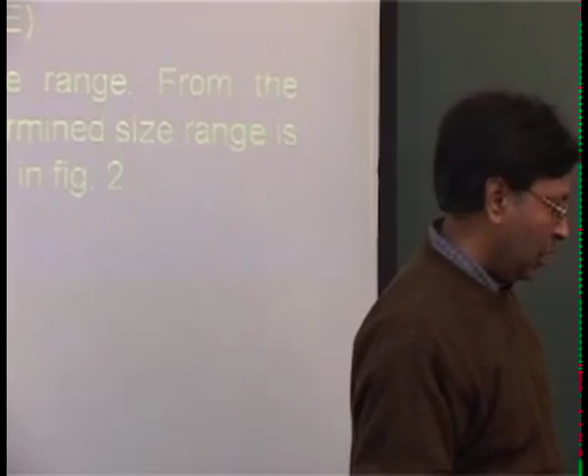Okay, then we'll go beyond what we have been saying last time in terms of the particle size and things like that. We have to now go slightly more into the particle sizes. The reason is that particle size is not uniform, unfortunately, and there will be a lot of variability there. So we will spend some time on the interpretation and see how the data in the atmosphere really look like.

The particle emissions from both man-made and natural sources do not consist of particles of any one size. That's what we said, because last time we were just sticking to one particle. Instead, they are composed of particles of a relatively wide size range. It is often necessary to describe these size ranges. Particulate matter for size distribution evaluation is measured in a variety of ways. We have to give the size distribution, like what is the mean particle size and what is the standard deviation of particle size.

Cascade impactor. Have you heard about the cascade impactor? No. See, when it comes to the matter of interest, either when you are controlling particulate matter or trying to see what particulate matter is in the atmosphere, size is very important, especially from the health point of view, and also the way you have to design a system, which particle size you want to remove. So the system which segregates the particle size uses something called a cascade impactor. It is based on inertia.

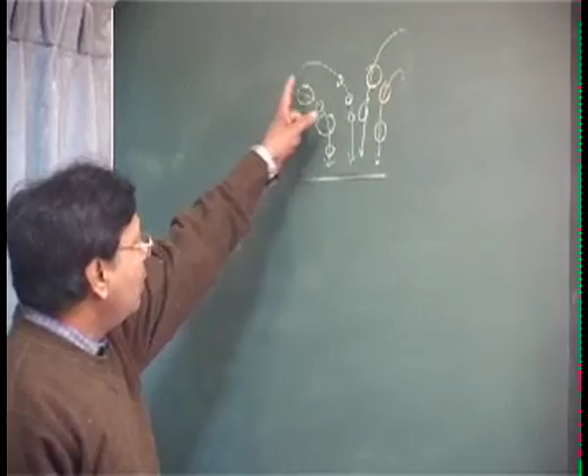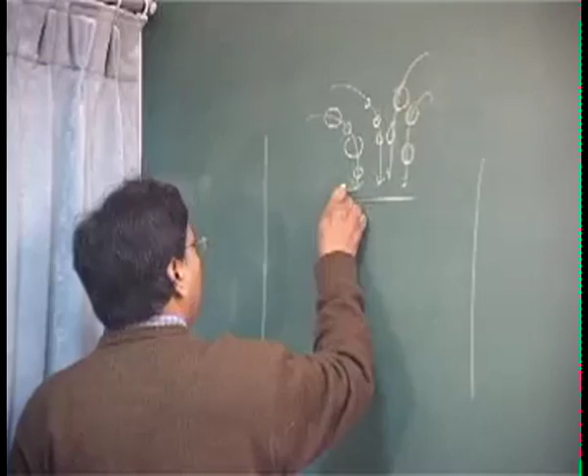Suppose I have a plate here, and my airflow is coming onto this. We have particles of different sizes, many small and some big. The particles as well as the gas stream both have inertia, right? Who has more inertia? The particle has much larger inertia, whereas the gas has almost no inertia. So the gas streams will try to turn and follow around, going beyond this plate.

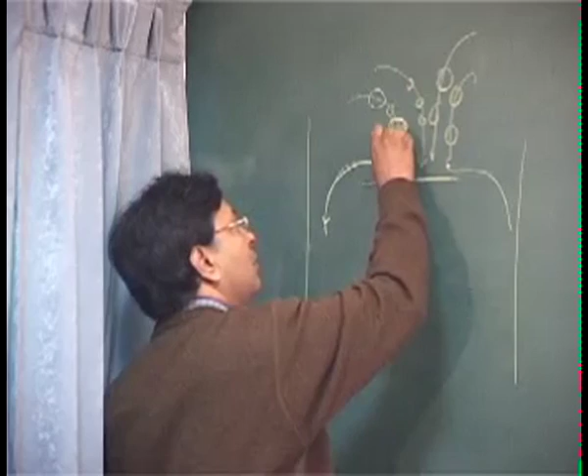Now even amongst the particles, the larger particles will have more inertia, right? So the larger particles will tend to separate out from the stream, because with their inertia they try to travel in the same direction. Whereas the small particle will escape, going along with the gas stream. So the larger particle goes and hits the plate. And to capture this particle, if you wish, you can put a little oily surface.

Once it hits, you separate out these particles, and the smaller particles will continue to move out along the gas stream, while larger particles will be stopped, just based on inertia. And then I can have a filter here, and all my fine particles will be collected here. So I can separate them out. This is called a cascade impactor.

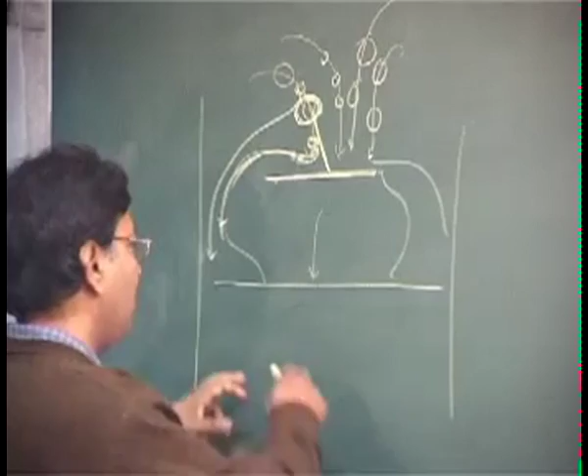It's a cascading effect. If I want to further fractionate, I can add further plates, so that some particles will stay here and some will continue to go down. So I can even find the particle size distribution. Sometimes I use the same concept while controlling certain particles, and sometimes for measuring particles in the ambient air.

In a cascade impactor, the particulate matter is separated into diameter size categories within the impactor head during sampling. The mass of particulate matter contained within each size range is recovered and determined gravimetrically. Now you can measure these particles, and most of the equipment you see will be like, for example, a PM10 analyzer, a PM10 sampler basically.

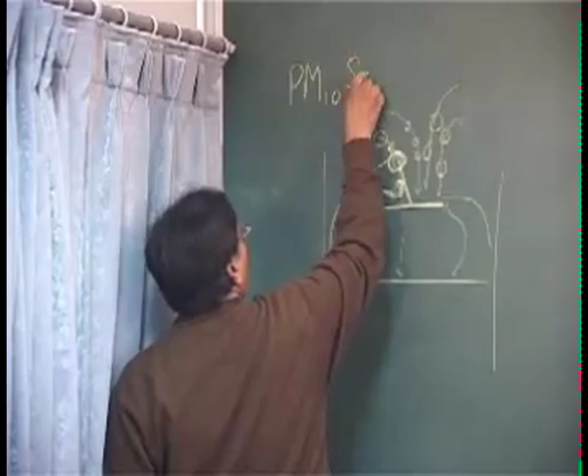Time permitting, I might show you that picture also. So in PM10, all the larger particles will stop and only PM10 particles will be retained here. Okay, the particle size less than 10 aerodynamic diameter. You can do the calculation, you can design the things because you know the inertia, you know the general structure of your particles in the atmosphere.

Particle count is also a very important thing. Some of the medical people prefer not the mass but the number of particles that are there. There is another method of data interpretation for the size distribution. We will show you figure 1 in a moment. I will show you the fly ash collected on a filter paper. The filter paper material also depends on what kind of material you have, and the reason for a particular type of filter paper material can be many.

Sometimes suppose you are doing a sampling inside the stack, and you know cellulose is very ordinary paper, right? And suppose the stack temperature is high, and you have made a very sophisticated sampler that you only want to sample the PM10 particles coming from the stack. What will happen? In the stack, the temperatures could be high, so the cellulose will completely burn out. You will say, oh well, you didn't get anything. In that case you may like to use Teflon.

Sometimes, suppose you want to find out the metals in the atmosphere. Suppose the filter paper where you are collecting itself has a lot of background heavy metals or metals, then it becomes a little problem, because the background pollution will be interfering so much with the actual thing you want to measure, so then your choice of filter paper can be different. Okay.

The particles shown in the figure are in the size range 1 to 5 micron. From the picture, the number of particles in a predetermined size range is tabulated, and that I'll show in figure 2 in a moment, because that's how we analyze the data. So what you are seeing here, the white dots are the fly ash particles, and these little black things are the filter. When you look under the microscope you can see these particles, and in fact you can also determine the particle sizes through some of the equipment.

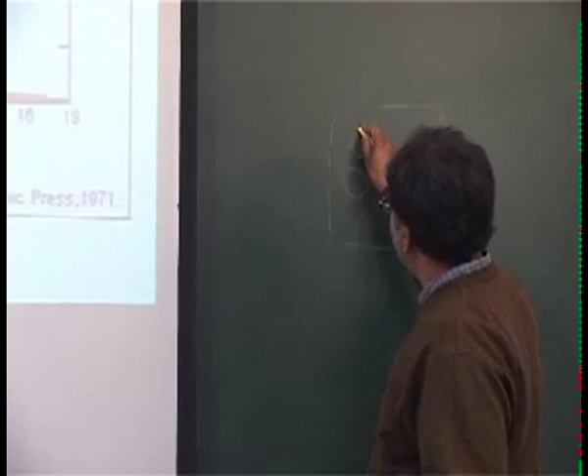What they do, some of the equipment, I'm forgetting the name, they will see the particles, they make some kind of fringe through the lights and the mechanism they have, and then that particular size of the fringe along the particle is measured through electronic means.

But the other way to show the data, because sometimes the interest may be in the larger particles, then you want to say how much quantity is the larger particles, because you have to design an equipment sometimes for a specific particle size. Maybe you want to just remove these particles. So the loading can be different for the larger particles and smaller particles.

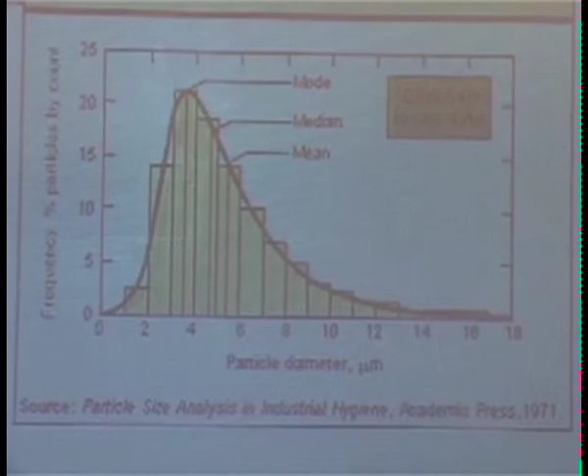This is simply a frequency plot for the percentage by counts. So the number of particles by counts that will be in that category, versus the particle diameter. And obviously we all understand mode, we understand the median, we understand the mean. There's nothing new about this one.

But I think what you need to understand from here is, suppose you have a very wide range, or not quite wide. Let's say you have something like 1, 2, and then you have 3, 3, 4, 4.5, and 5, 5.5, and you have another data point of 30 and 15. Okay.

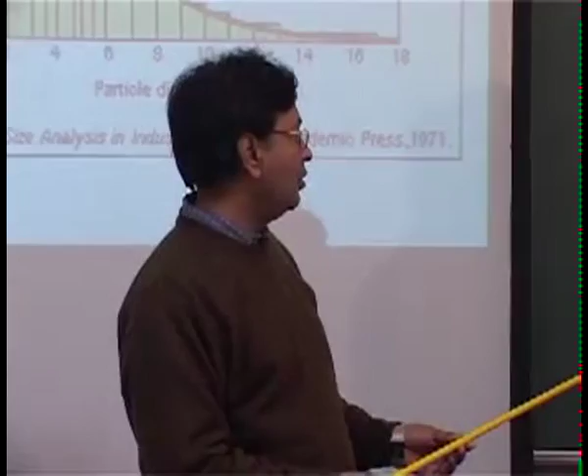You have to be a little careful sometimes. What you want to take is the mean or the median here, because you want to find out the average particle size. So you have to be careful that in such a data set you take the median, because that is a much more robust central point.

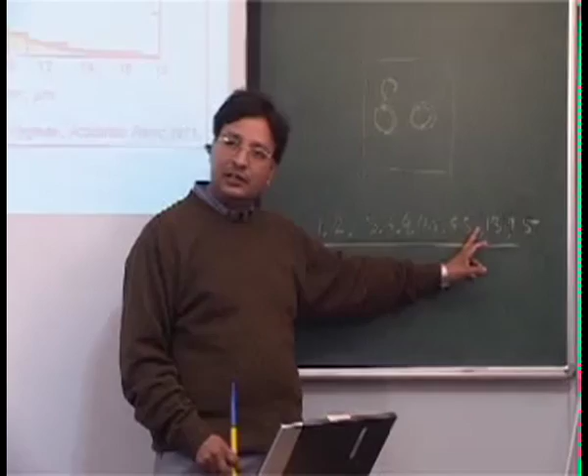Because you can see these points which are really not quite there, but they will influence your arithmetic mean hugely. And sometimes we make wrong decisions and say most of the particles are sitting somewhere at 7, and you see we have no particle at 7, not even one single particle, because the average may come out to be 7 because you have the large numbers here. But if you take the median, you can suppress the effect of the large observations.

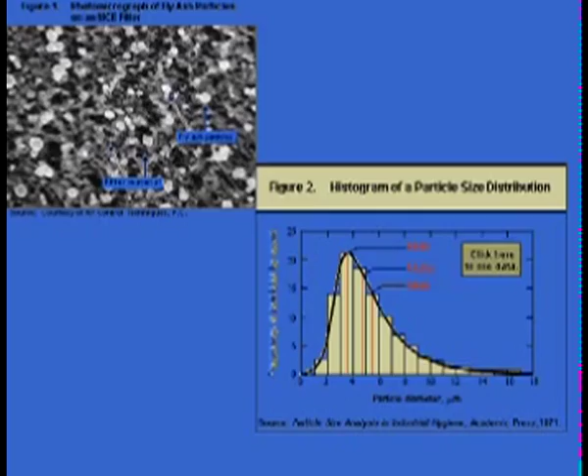The other thing which you need to see quickly is the skewness of the curve. Is this skewed to the left or skewed to the right? Skewed to the right. Always remember, because it has the extended tail onto this side, it is skewed to the right.

Most of the time, 99% of the time, when you look at environmental data, not only in air pollution but in water pollution, soil pollution, when you plot these measurements, you will find the data to be skewed to the right. Such a distribution is obviously not the normal distribution; this is what we call the log normal distribution.

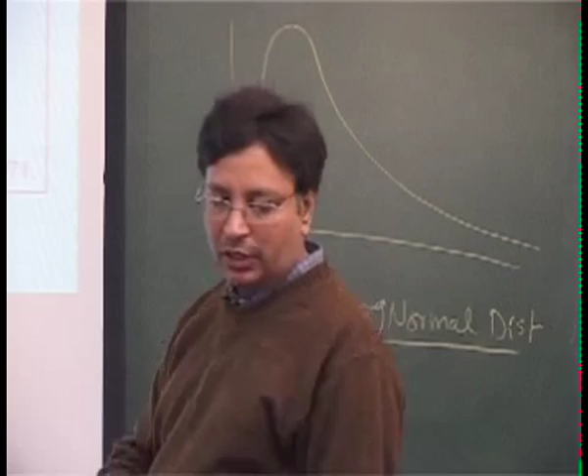We should be a little bit aware of that, because data are skewed to the right. So that is the skew thing which I wanted to show, and obviously the other way I can plot the same graph is to take the logarithm of these values, and that's what has been done to show this data, well, not quite, anyway.

Skewed distributions as shown in figure 2 are typically encountered in the field of air pollution control, and not only air pollution control, even water pollution control data. Any guess as to why the data will be log normally distributed? One of the reasons is that we are not likely to get negative numbers. So as a result, there is a tendency towards the right side, and that's why the data always skew to the right.

The median and arithmetic mean: we all understand that the mass median particle diameter is the particle diameter that divides the frequency distribution in half. The arithmetic mean we all understand, and the mode is, of course, the most frequently encountered particle.

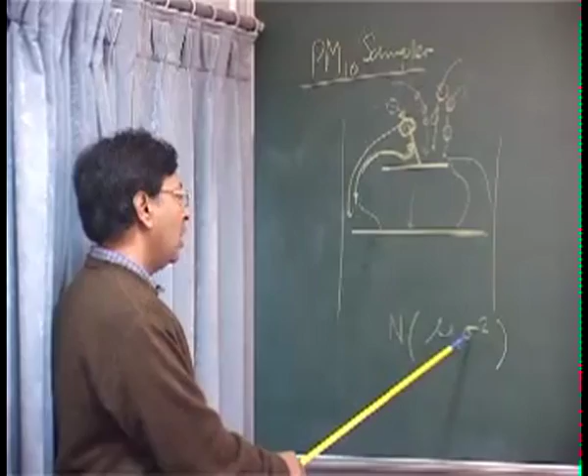So you can find the mean and variance, and if I want to describe the whole data set, suppose it is normally distributed, that is enough for me to describe the whole data set. You just write the data is normally distributed with mean mu and variance sigma squared, or you can say it is log normally distributed with mu and sigma squared.

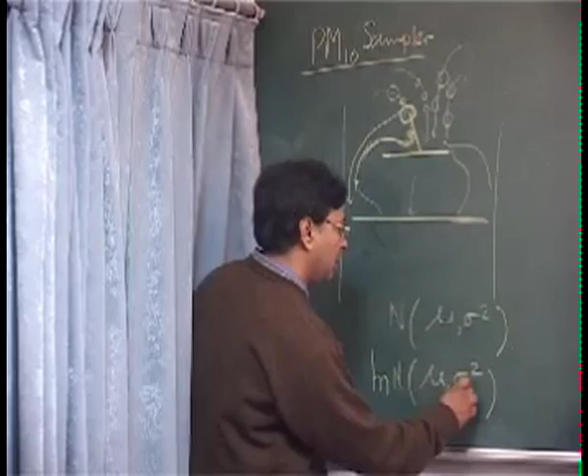Okay, some people prefer, because of log normal or geometric mean, to put ln here. Enough to describe the entire data set. Okay, how to find out the mean and variance, or other ways to find them out; we'll quickly define those terminologies, because we might use them sometimes when we are talking about the control technology.

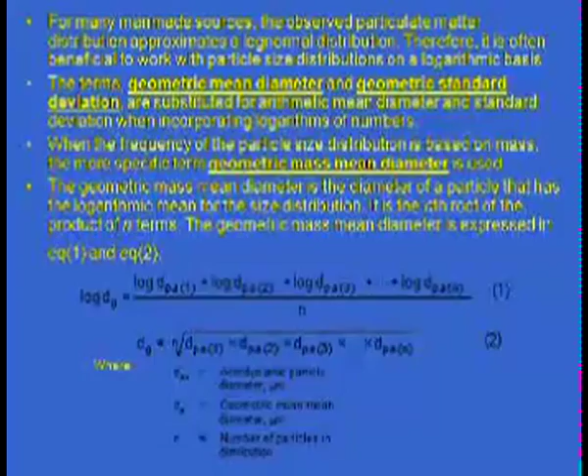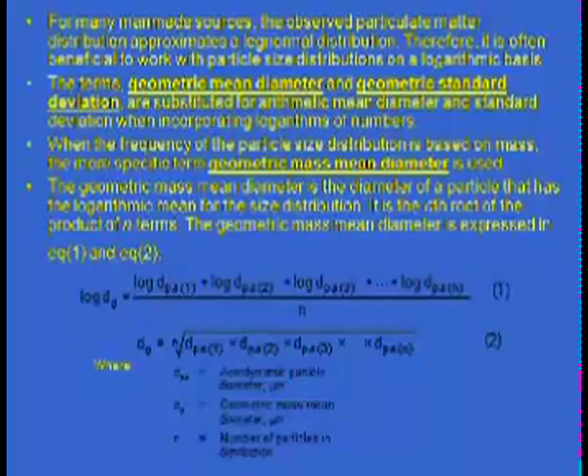Okay, the geometric mean diameter and the geometric standard deviation are substituted for the arithmetic mean diameter and the standard deviation when incorporating the logarithms of the numbers. You can take the log of each of the particles and then take the simple arithmetic average, but what it is giving you is log dg, and what I am interested in is the geometric mean. So that is how you get the geometric mean; you can come from here to here.

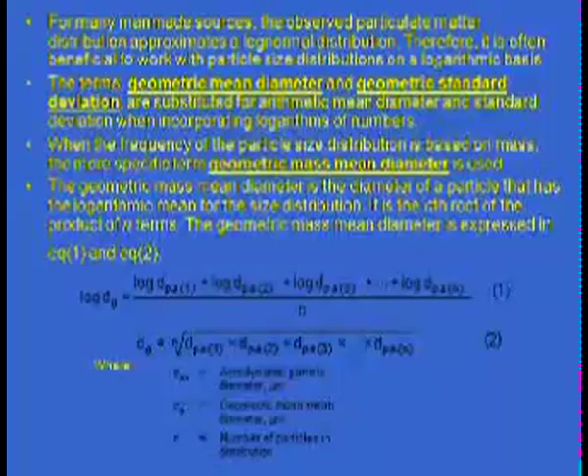Okay, the interesting thing which I want to share with you is, suppose you have observations which are a little widely distributed, 3, 5, 9, and you find out the arithmetic mean. If you take the logarithmic mean or geometric mean, what difference do you expect in these two numbers? They should be somewhat similar, of course, because they are both trying to measure the same thing.

But you will see here the impact of the larger values is kind of suppressed. And that sometimes is better, because if you have the data distributed, you expect some numbers to be more onto this side, and then you see it is compressing. So sometimes, when trying to get a more accurate number, the geometric mean is better than the normal arithmetic mean.

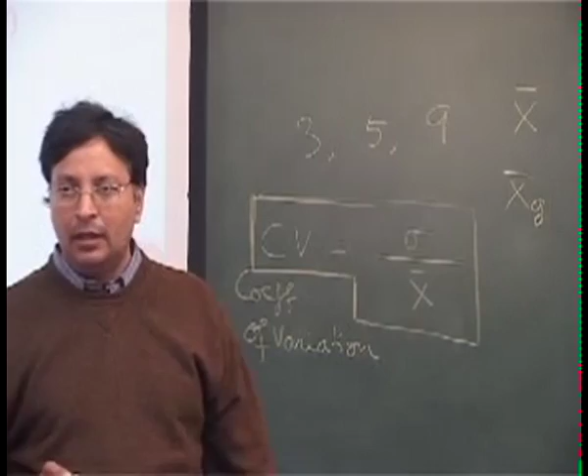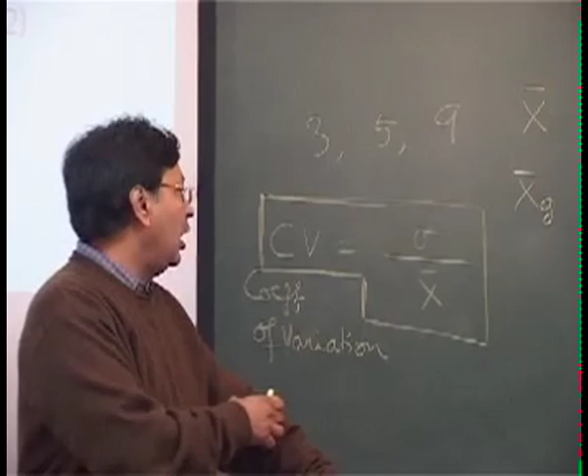There is another thing which we sometimes want to define, which I am not writing here: the coefficient of variation. This is your standard deviation divided by the mean. Very simple thing, but very useful. Why useful? Sigma gives you the variability in the data, and what units will sigma have? It will have the same unit as x, right?

So suppose I am comparing the variability, let's say we talk about water pollution, in terms of BOD and COD. Or let's say you are comparing between BOD and pH. The measurement of BOD is in milligrams per liter, and that can vary from 2 to 2000, and pH will vary in a narrow range, and the units are different.

But you want to say which data is more distributed. Where it is more distributed, you have less confidence in the measurement. So for any data you can find out the coefficient of variation, and it becomes dimensionless, and then you can compare anything versus anything. Another little tip, more like a thumb rule from experience, you can also try this one.

Generally, if it's less than 0.5, you would expect data to be normally distributed. Generally, normally distributed.

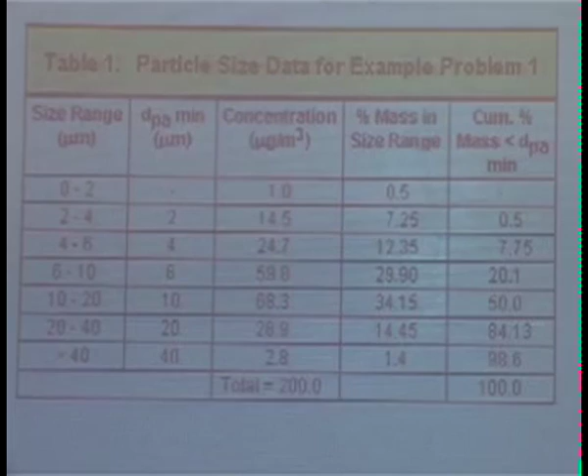Now what you want to do is the percent mass in the size range. So what have you done here? Now you're looking at the mass. How will you get this number? Simply by dividing by 2 in that range. And then you want to plot the cumulative, so the cumulative here is 0.5, then 0.5 plus 7.25 is 7.75, 7.75 plus 12.35 is 20.1, and so on.

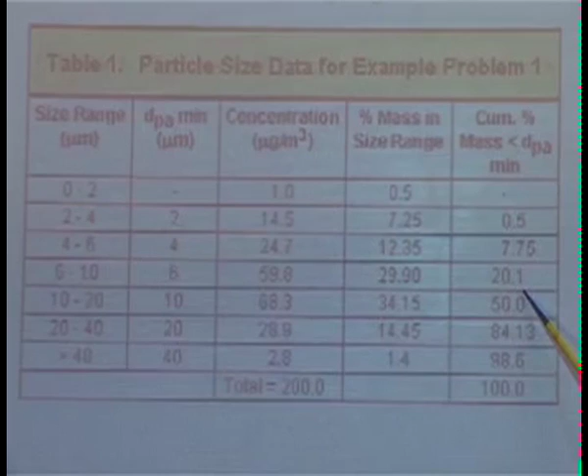And finally what I want to plot is this versus this, and it will become a straight line. The provided data is log-normally distributed. So we wanted to find out the geometric mean and geometric standard deviation. The particle size is plotted on this side, in micrometers, but on the logarithmic scale, right? And the cumulative mass fraction is on the probability scale. When you plot both on the log scale, it becomes a straight line.

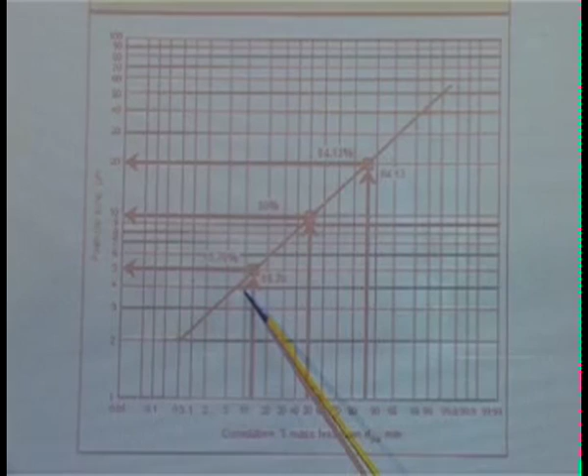So once you have plotted this, if you recall, the lowest range was 2, and corresponding to 2 the mass concentration was 0.5. Then we went to the range of about 4, and it was something like 12 point something. You go from here 4, and this is a point. What was that? 12 point something, right? 7 point something, I'm sorry. So you will get 7 point something from here, and so forth.

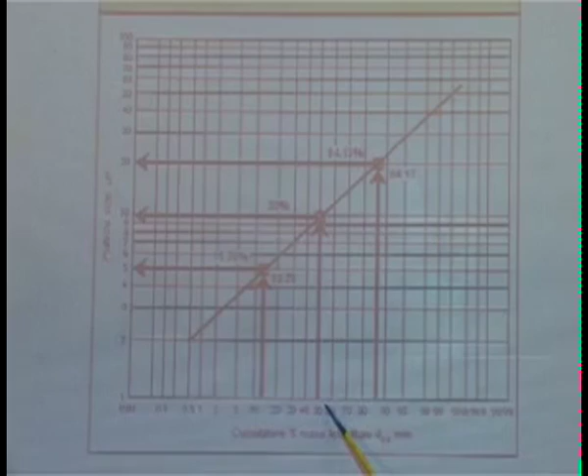And at the 50%, D50, where 50% of the mass is, that will be your geometric mean diameter. So here the particle size of 10 micron is the geometric mean, and then if you go to 15.87 and 84.13, you will get the value of standard deviation. Do you know why it is standard deviation? Let me also recall here.

We're plotting the cumulative. This is not cumulative, this is simply a frequency plot. So that's one standard deviation, and how much is this area? Anyone remember? 68 or something? 68%. So this will be 50, and then this will become how much? Can we find out from here? 16 something? 15.87.

This is a simple thing, of course, but an important thing; we should make it a habit as practicing engineers. Every time you need to do this. It's not all the time you're solving huge equations. Most of the time you will deal with this thing. So you can find out the standard deviation. How do you find out the standard deviation?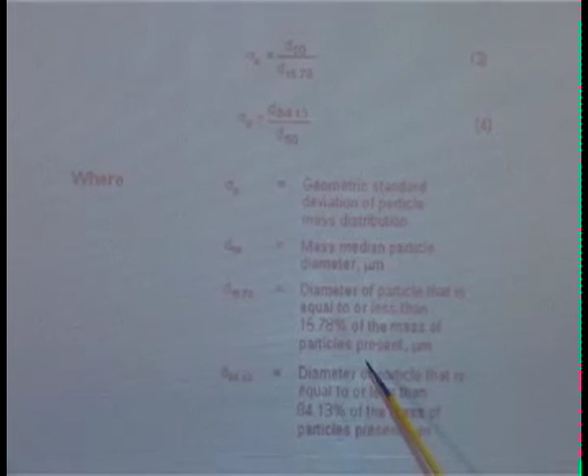See here, now you can find out the geometric standard deviation. Take the value of d50 divided by this. Why division? Because there are logarithm terms, right? The observations we were getting were logarithmic values. So you divide either d50 by d15.78 or d84.13 by d50, and you will get the geometric standard deviation of the particle mass distribution. This is your median, and these correspond to 15.78 and 84.13.

The other thing I wanted to tell you, let me think. Any measurements that you have and you're plotting some cumulative thing, this is the simplest thing I'm telling you. There are more complicated things. Handling the data below detection limit.

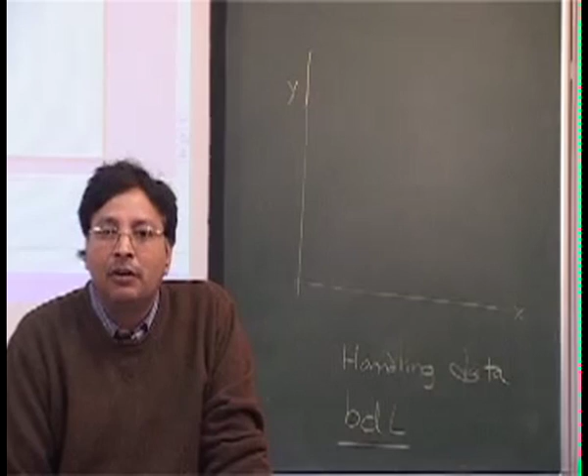As an environmental engineer, it is very challenging when you do some measurements and the data are below detection limit. You can't ignore those numbers because that is information, although it may be incomplete. Suppose you are measuring mercury, for example, and your instrument's minimum detection limit was, let's say, 0.5 nanogram per liter.

Some of the observations were this, some of the observations were higher. How will you utilize this information? Okay, that becomes tricky. So in that case, what you do is you plot the data.

Plot the data as the way we have seen it, and of course in this range, you can't plot the data. You're measuring x and y. There was something you are measuring and then some response. So what happens? X is generally easily measurable when you are plotting x and y. Y is a response. Suppose you could measure this.

And then for this corresponding value, when you measured the mercury, let's say this was your wind speed. Wind speed you can measure easily, but for that wind speed you measured the mercury, and then your instrument said below detection, below detection. So you can plot the things on the x direction, but you don't know what will be the values here, because your instrument said less than 0.5. So it doesn't mean the value is 0.5. It doesn't mean the value is 0. It doesn't mean the value is 0.25.

We don't really know where the value is, but still we don't want to throw this information, nor do we want to use it improperly.

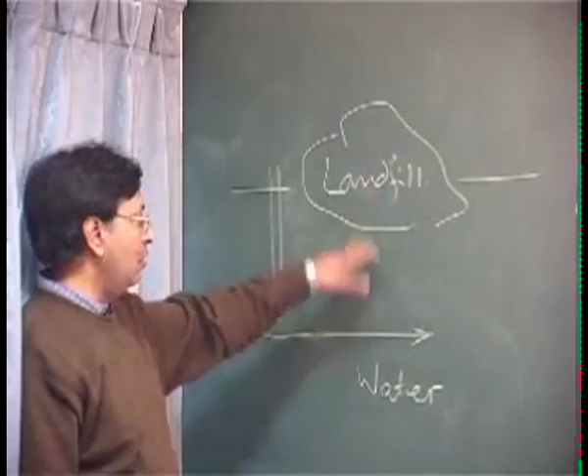There was a serious court case in the US. It was a landfill. This is the flow direction of water. Then they have the bore wells, and they'll take some observations because of the leachate pollution. They're saying this landfill is polluting the groundwater.

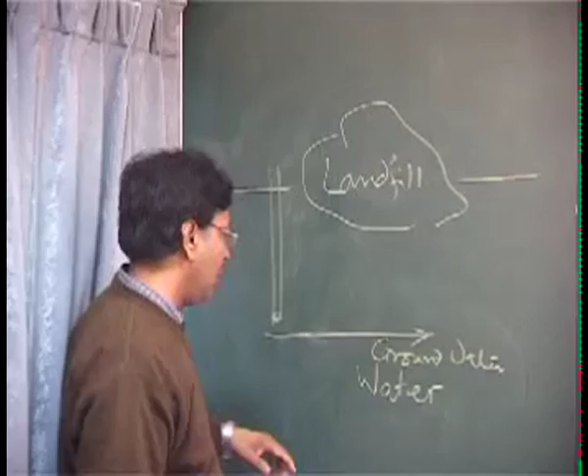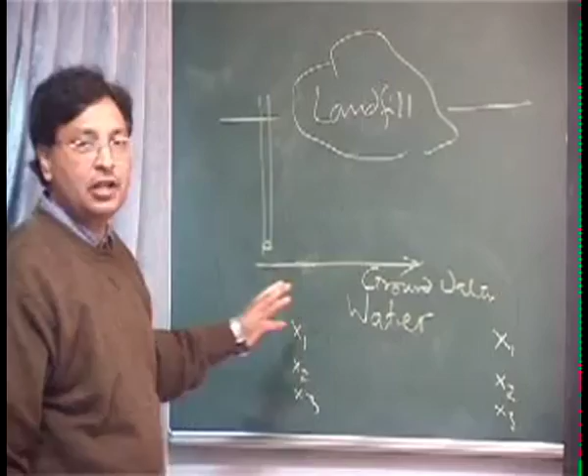So they'll take some samples here at the upstream and take some samples at the downstream. They took the measurements 1, 2, 3. This was the industry, which is the landfill company, versus the regulatory agency.

They are saying that you are polluting. Suppose this data were less than 0.5, for example. Now the company said please take this value as 0, because they wanted to lower the impact. The regulatory agency said, well, we'll take this equal to 0.5.

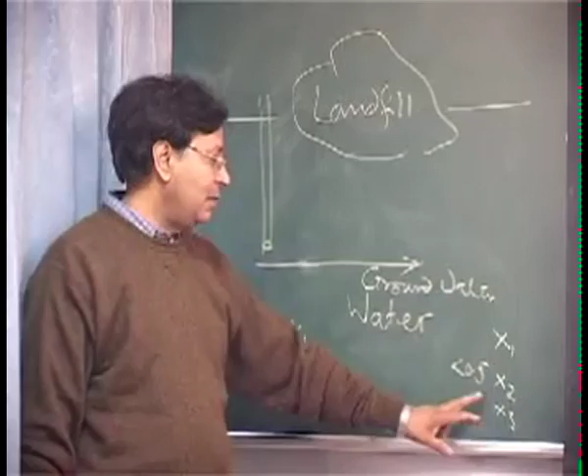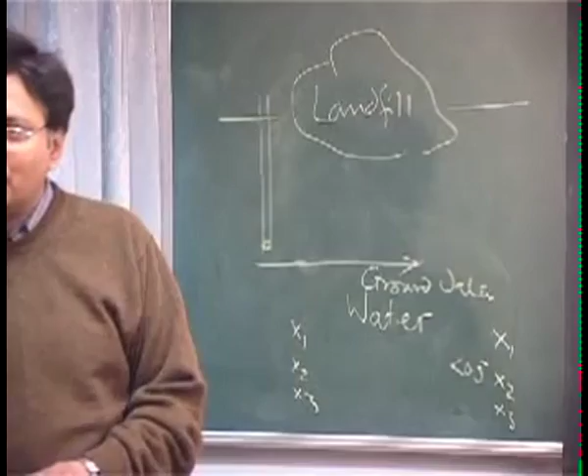There were more data points, I'm just cutting the story short. So then it became the problem as to what the value of x2 should be taken as, because it's anyone's guess. It can be very close to 0.5 or it can be very close to 0, and it means huge implications. This could be closed down, this could be fined, a person could be imprisoned because they are polluting, etc.

The same kind of problem can also come into forensic measurements, like DNA and things like that, where there's some problem in the measurements, something lower than a detection limit, or they have some information but incomplete information. So one of the simplest ways to handle this is that whatever good data points you have, you plot them.

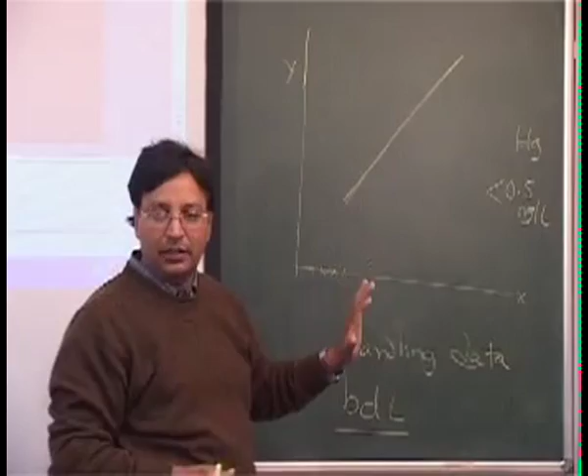And then whatever line you get from the good data, because you know the data will be log normally distributed, and you've established that with good data, what you do is extend this line at the same slope. And then for this you can estimate a number. God knows what the true number is, but it's still a much more scientific way to estimate this missing data than doing something like taking half of the lower level plus the higher level, or just taking the higher level.

People to their advantage will like to make something. Somebody will say, well, please take this equal to 0.5. Somebody will say, oh, you should take 0. Or somebody who knows a little science will say, please take 0.25. But none of them are correct. There are still many complicated statistical ways to handle this, but this is the simple approach.

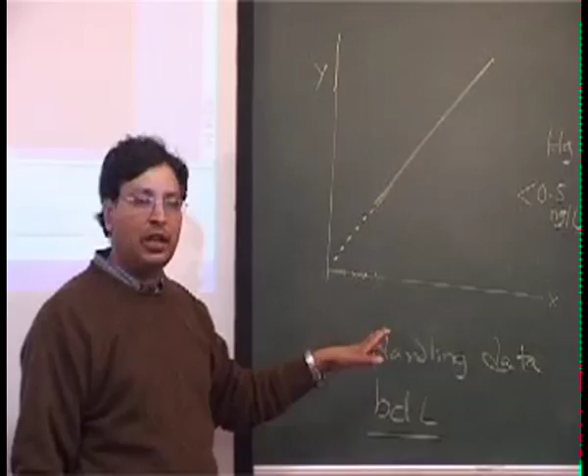You could measure x, but the y response you did not get through your machine or equipment. But the rest of the data points were good. You can't say all the data were below detection and then still improve on that. You can't.

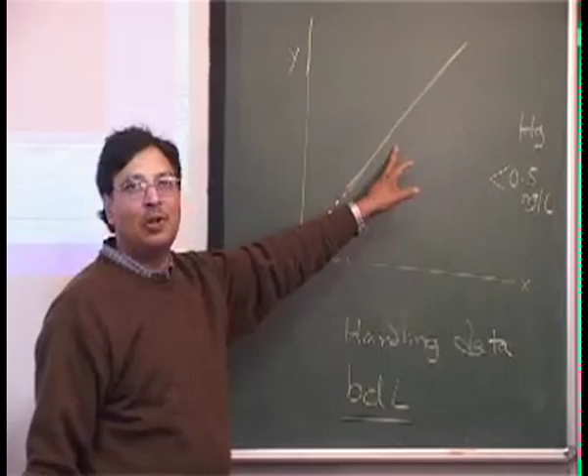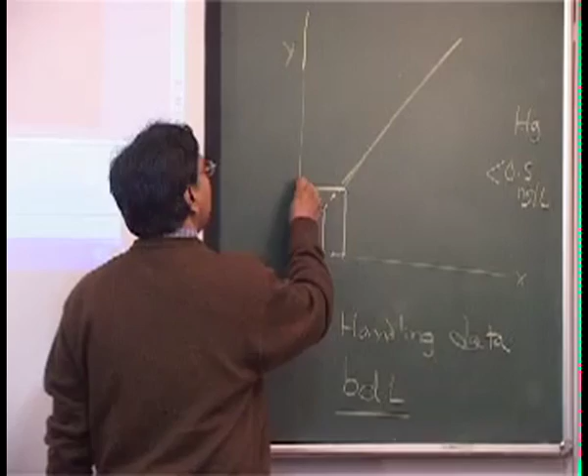So with this, if it is following some kind of distribution, it will continue to follow in all likelihood the same kind of distribution. So for this, you find the response y1, y2 for this data which are below detection, and then use these numbers, finding out the overall average, mean, standard deviation, whatever you want to do.

It's the same thing we did, and then you go with the same graph, with this ratio of d50 to d15.87. It'll be more or less very close to the same thing, provided your distribution was bell shaped and normal. Well, we'll leave that graph for the moment.

Sometimes you will find that some graphs are plotted, and you should approximately understand why they are shaped the way they are. So here what we are plotting is the number concentration, and the units at the back, which you probably can't see, are really in nanometers.

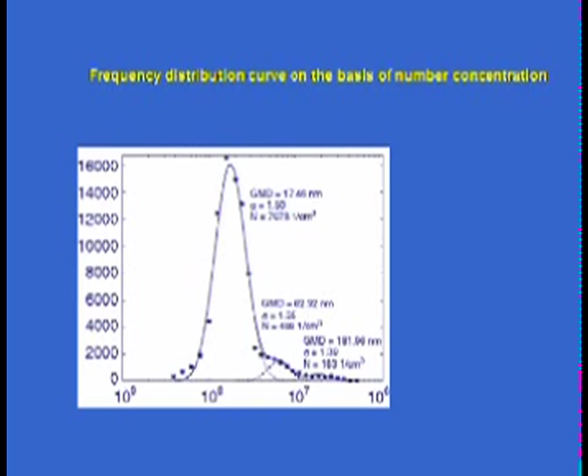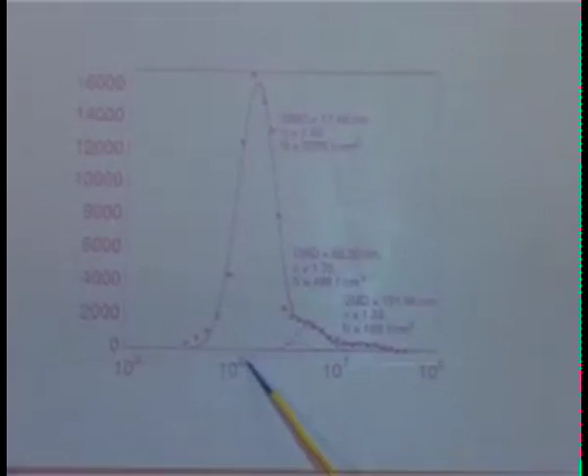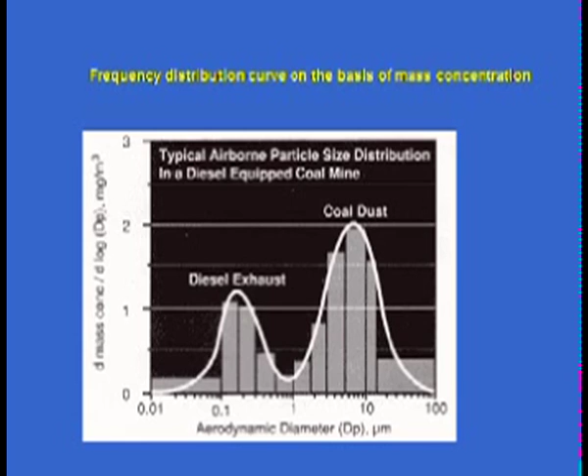So you can find that out, but what you see here is that the smaller the particles are, the more they are in number. So you have to look at the graph and see whether you are talking about mass or number. If you look at the mass, the distribution is entirely different - more mass comes from the larger size particles, and in numbers they are almost insignificant. So depending on what you're using it for, some medical doctors will prefer number concentration rather than mass concentration, but in environmental air pollution we mostly need the mass concentration.

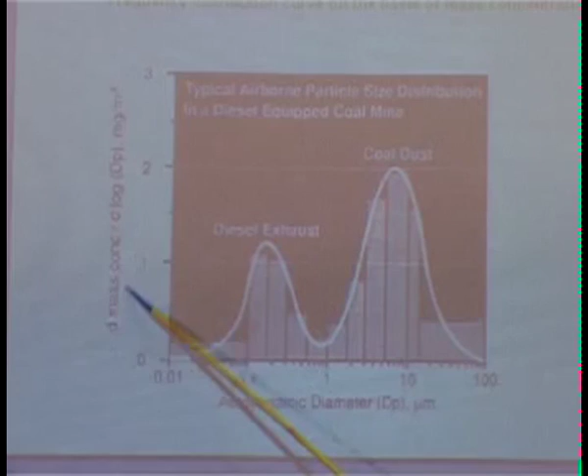So here you see the change in mass with respect to change in diameter on a logarithmic scale, and typically we get this kind of distribution. So you get the bimodal distribution.

One are the sources or particles which are generated more from mechanical operations, and these come out more because of some processes that happen in the atmosphere. Here are things like wind blown dust emission, sea spray, volcanoes, and particles more of the grinding kind, soil dust and things like that - so you have the large particle range here.

Whereas the finer mode particles are formed rather than created through mechanical devices - here you have the gaseous vapor. When you have very high vapor concentration that is super saturated, condensation will occur, and it will make primary particles - very small particles - which can come together and coagulate to make slightly larger particles.

But the other thing which happens very quickly is, if you have other particles present in the system, they can act as condensation nuclei, and the vapor can condense on them. As a result, even if it's not super saturated, you can see droplets being formed - like in a cloud, it's not hugely super saturated, but you have little seeds in there, so droplets will form and grow in size, a little bigger because you already have a parent particle on which it will settle.

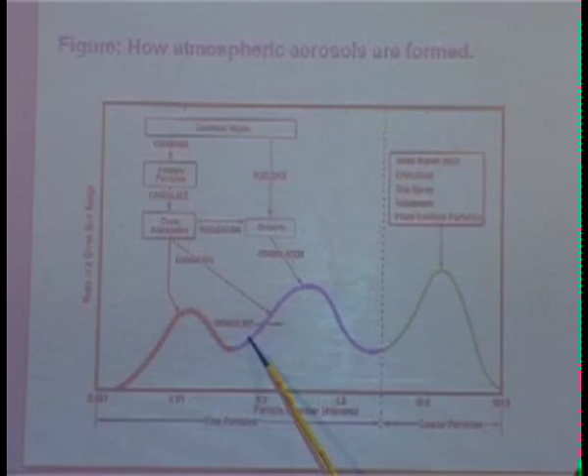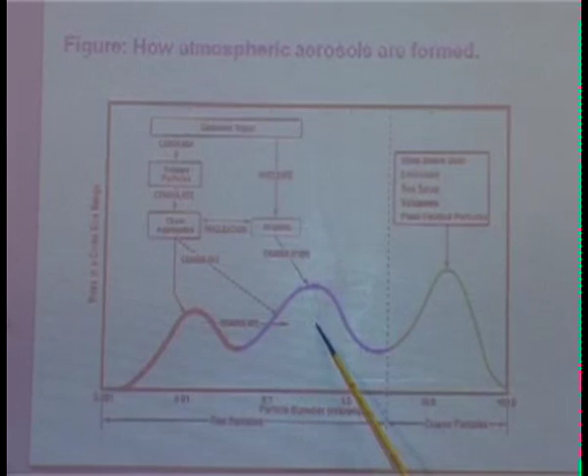But in the atmosphere, this process is called aging - these particles, even if smaller, agglomerate and coagulate, and tend to come more onto this side with time. So if you are very close to a source, say close to a power plant emitting at ground level, you might find a distribution like this. Move a few kilometers away, and you find this other one - and this is of course the other mode which will already be there. Okay, let me go to this.

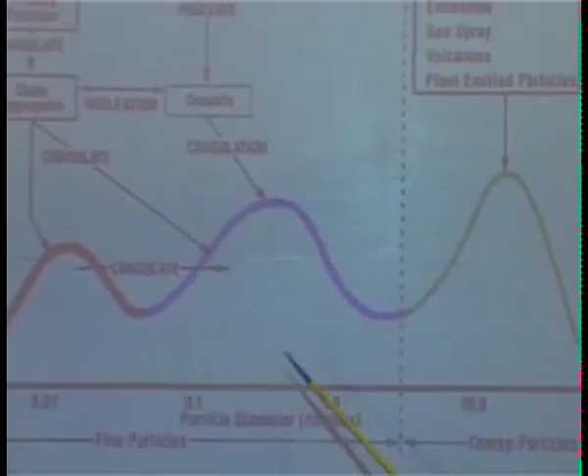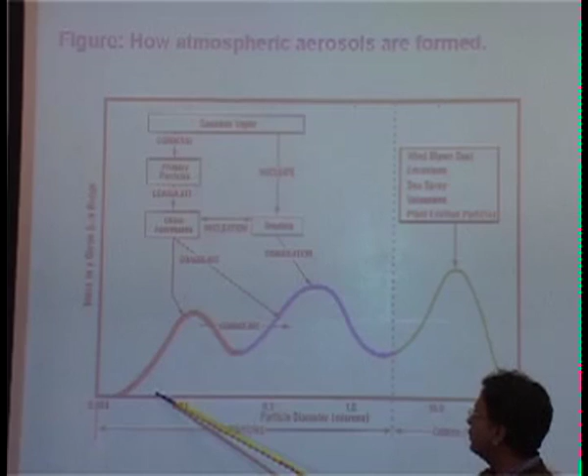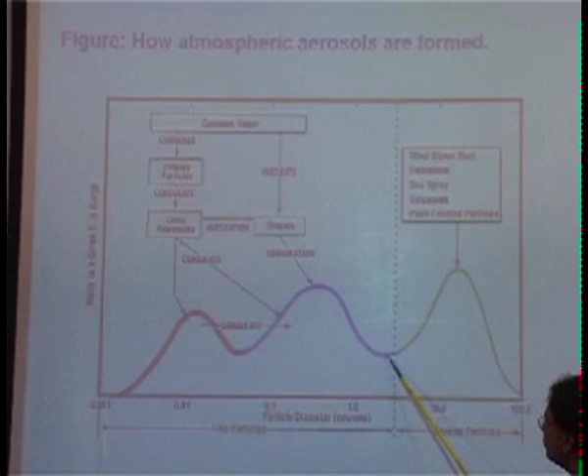These particles can coagulate, but these other particles don't coagulate, whatever distribution you get, they are just there. So as you move a little away from the source, this trimodal distribution eventually becomes something like this. Therefore, in air pollution studies, we generally deal with the fine mode, up to something close to 2.5. So there are distinct things you will get in the atmosphere.

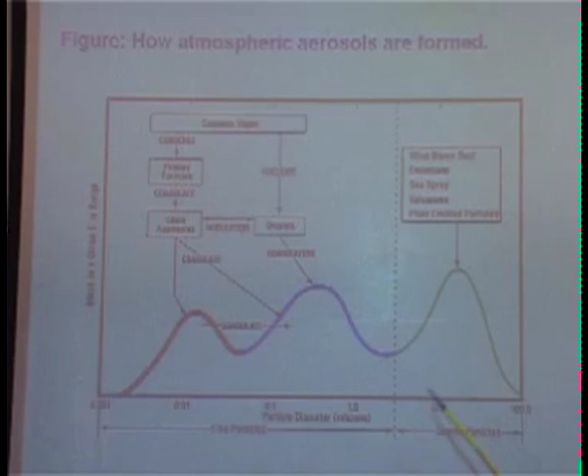All the standards we've been talking about deal with particles with PM10. Why PM10? Although you will get the size distribution like this, beyond that the air pollution effects are not so significant, because these are mostly stopped at the nasal cavity. PM10 can go to the upper part of the respiration system, and these particles become very dangerous.

People always ask why 2.5, what is so specific about 2.5, where has this number come from. My idea is that you should always know the simple basics - equations anyone can solve - but you should know the physics. Why this particle at 0.001, ultrafine, eventually as you move away from the source, becomes something like this, almost dying down, and then picking up here.

But you look at these particles coming from diesel and other sources - they are a matter of serious concern. That is how the trimodal distribution eventually becomes a bimodal distribution, and that is how the issue of PM2.5 comes in, because of the two modes. That's why sometimes we use the cascade impactor to differentiate between 2.5 and 10.

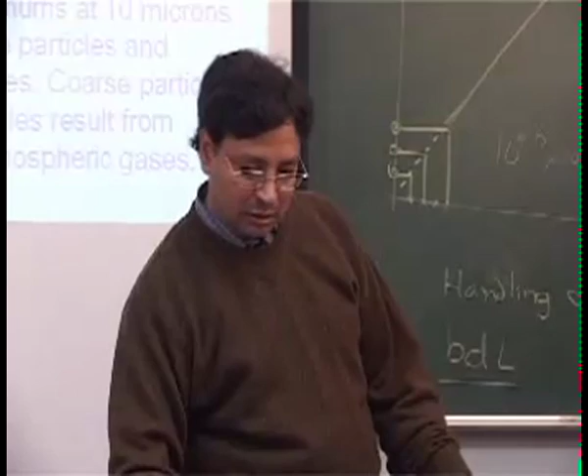Something similar, as you go away - remember we gave this range a name, the coarse fraction between PM2.5 and PM10. Okay, ultrafine and this and that.

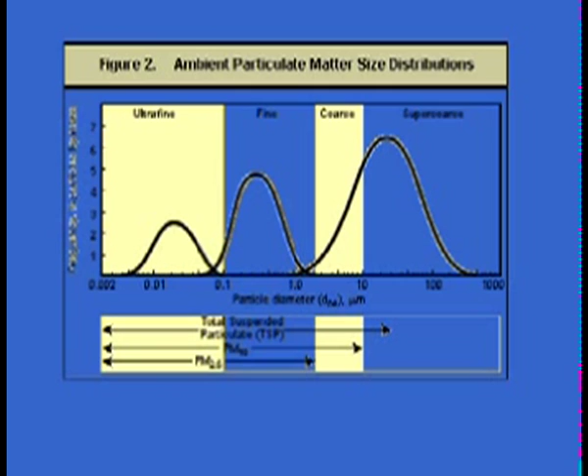If you look at the characteristics, this will mostly be sulfate, nitrate, ammonium - not from the soil, they have all been formed in the atmosphere. These are typical composition. You'll get lots of silica in the soil, calcium, aluminum must be there. So these are more like the larger particles, the soil dust.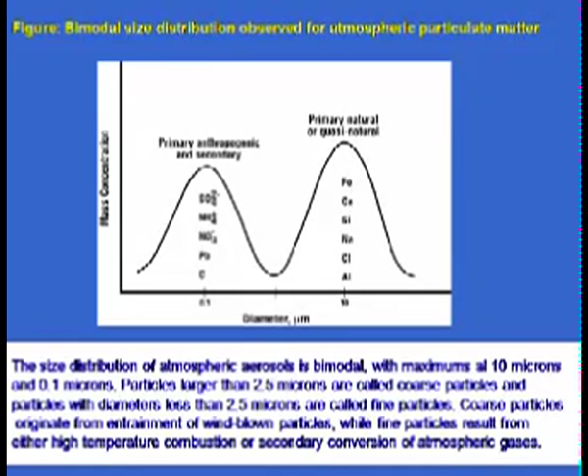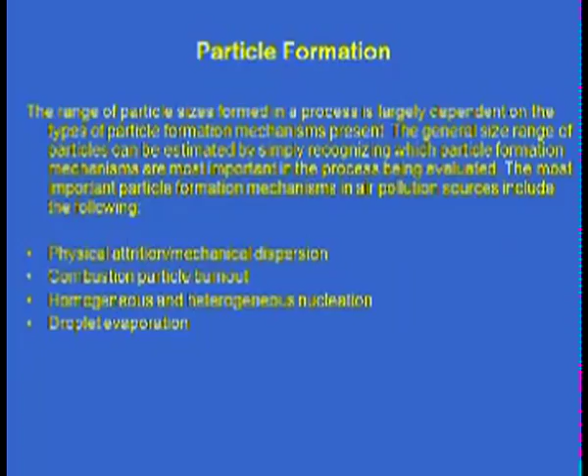We do this kind of study, but we'll skip this - this is very important, and we'll finish with this one: how particles are formed, especially the smaller particles. The larger particles we know are formed by physical attrition or mechanical dispersion; another way is from combustion particle burnout; another is homogeneous and heterogeneous nucleation and droplet evaporation. You will understand because fortunately we have good pictures coming up for you.

Physical attrition - these are the large particles that can be formed in industrial processes. This is the grinding machine, basically a grinding wheel. Things are being ground, a very common process, especially in ore processing to begin with - the grinding is done, and you see the little particles falling off, collected with a fan, and these particles will be large in size.

If you don't mention it here, it will be shown in a moment. This occurs when the two surfaces are rubbed and yields small particles that break off from both surfaces. So the composition and densities of these particles are identical to the parent material. Okay, so that won't change. So this is one way.

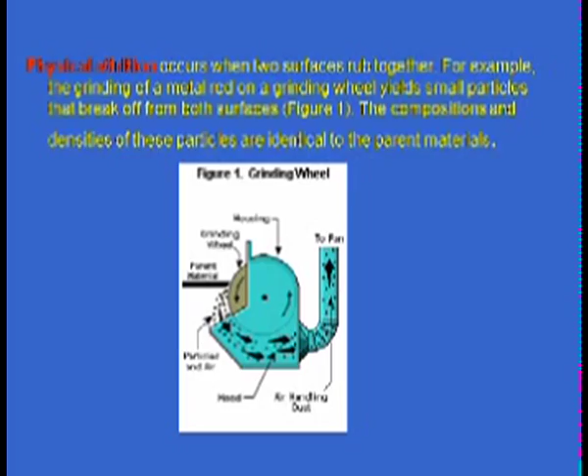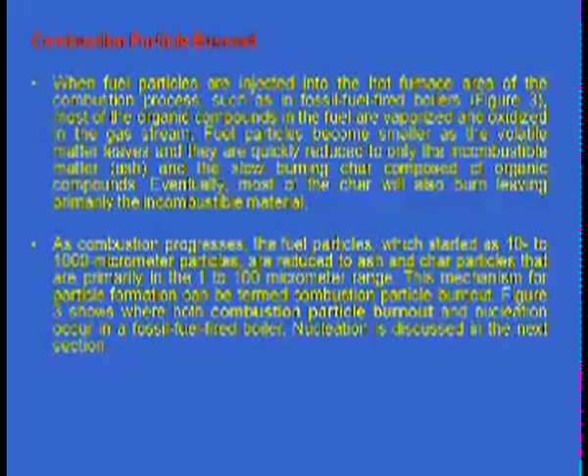The second way the particles are formed is, okay, there are more kinds of crushers, but they are not being shown. Combustion particle burnout. This is important to understand. Why the fly ash is generally much smaller than the coal that we are firing in, because the particle is

completely burnt out. As combustion progresses, the fuel particles, which may be larger, they started as 10 to 1000 micron particles from the coal mill, are reduced to ash and char particles that are primarily in the 1 to 100 micron range. This mechanism for particle formation can be termed combustion particle burnout. Well, I don't know if you have the figure here.

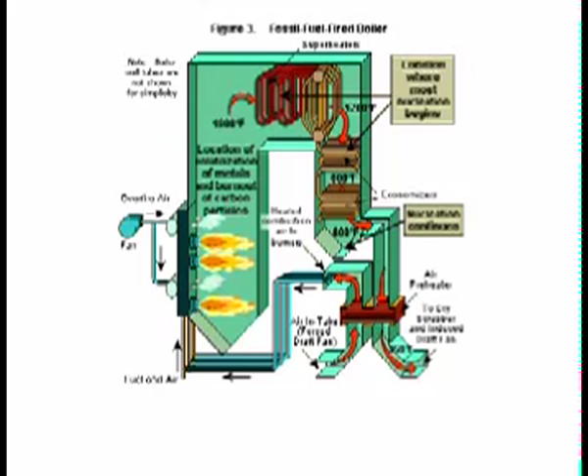When the combustion particles burn out and nucleation occurs in a fossil fuel fired boiler, nucleation is discussed a little later in the next section. So we are just talking about the particle burnout and everything together here. So once you are firing the particles here, this is the air which you are firing. The particles may be much larger here.

The location of the volatilization, and then immediately the organic matter and some of the metals, for example mercury, will quickly evaporate, where some metals won't, but mercury, and in fact lead also to a large extent, will evaporate. Then the cooling is there, and then the location where most nucleation occurs. The moment the temperature drops, some nucleation can occur right here, and largely it is talking about the nucleation which can occur right inside the process.

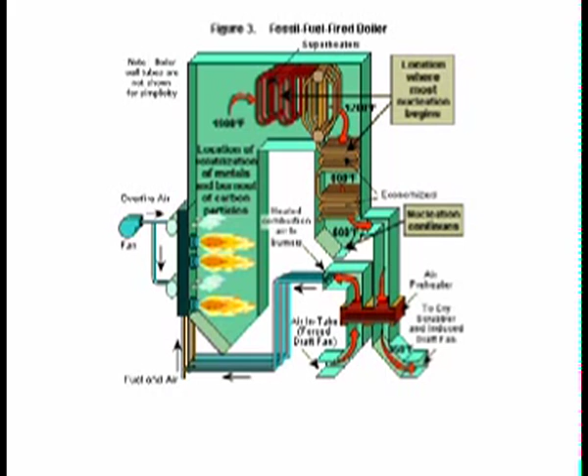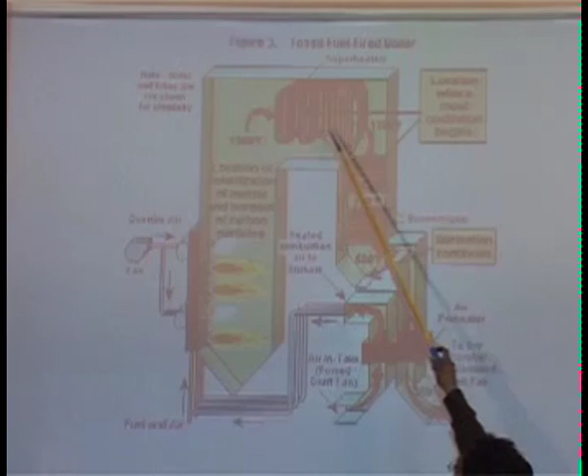So this is because you need a certain temperature. With that temperature, suppose the burnout is not complete, the vapors will continue to go up, and now there is no opportunity for the vapors to be burned out, so the vapors escape and then, through nucleation, they can become particles. And nucleation is something you should understand. Maybe we will talk again in the next class.

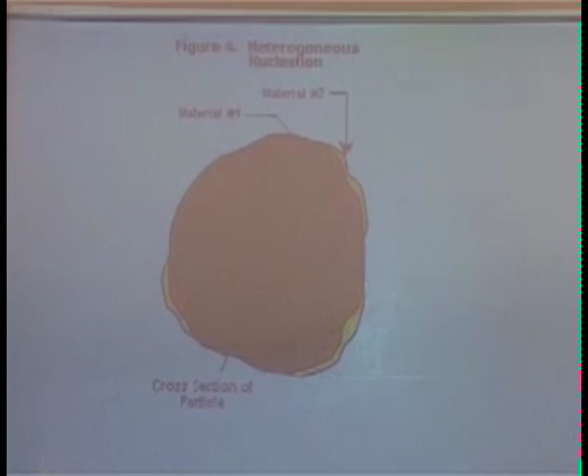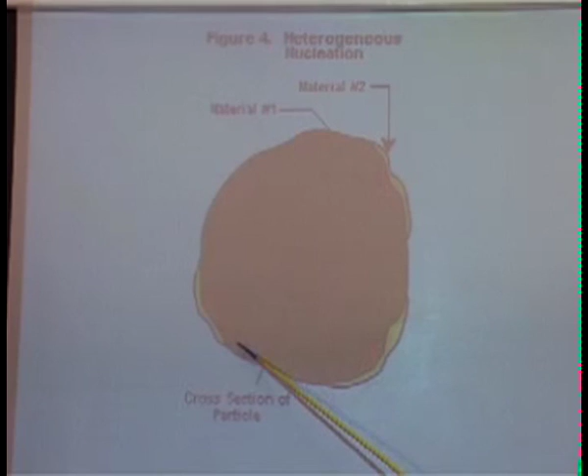There are two kinds of nucleation. One is heterogeneous nucleation and one is homogeneous nucleation. For heterogeneous nucleation, you need already some parent particle on which the nucleation of your vapors, that is your material 2, should occur. And if you don't have material 1, then homogeneous nucleation can occur. For homogeneous nucleation to occur, the supersaturation level has to be very high, otherwise that won't happen. And this is the thing.

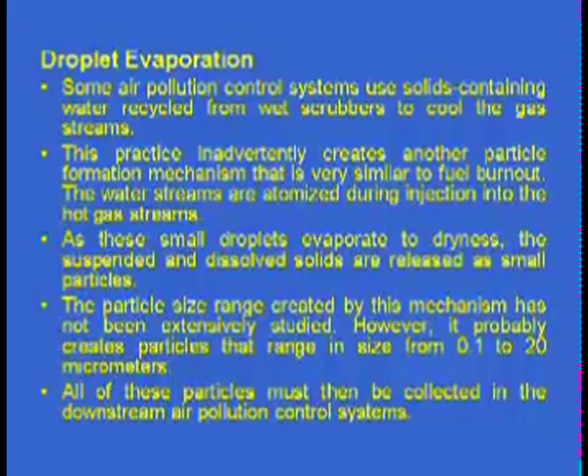Another thing, in some coastal areas, the natural sources also include droplet evaporation, because water droplets may escape from the sea, and then the moisture evaporates, leaving behind its dissolved solids, which will be very, very fine particles.

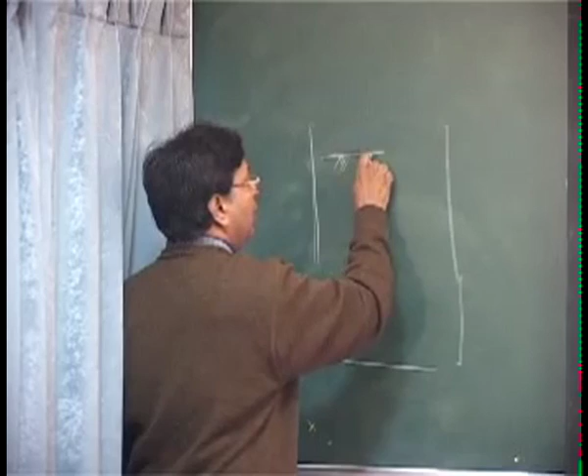And the same thing, you will be surprised, we use a lot of scrubbing systems for treating the gases. Suppose I am entering SO2 here, and I am spraying something that can dissolve the SO2, maybe a slurry of calcium carbonate.

So after this, there will be a few mist particles that will emit out at the source, like this is the source, and as they emit out from here, you can see some particles coming, which sometimes look like little water, but eventually the water evaporates and it leaves lots of particles in the atmosphere, which were dissolved in the water spray. So that is another source.

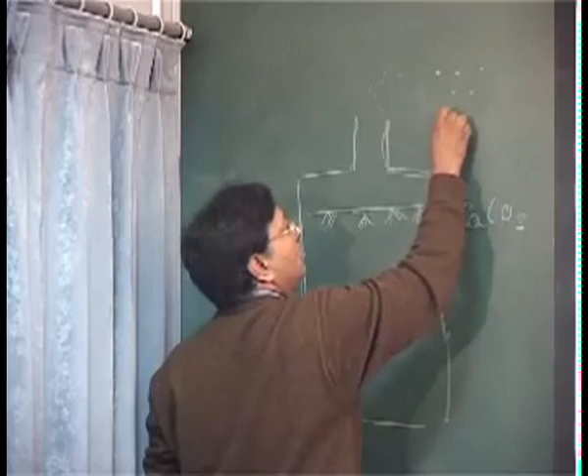We'll discuss more details of this in the next class, but you can see the mechanisms through combustion. Burnout is a different thing, nucleation is a different thing, drop evaporation is a different thing, and ordinary mechanical crushing is a different thing. And they will all give you different particle sizes. And if some particles are formed through chemical reaction, they will always be very, very fine.